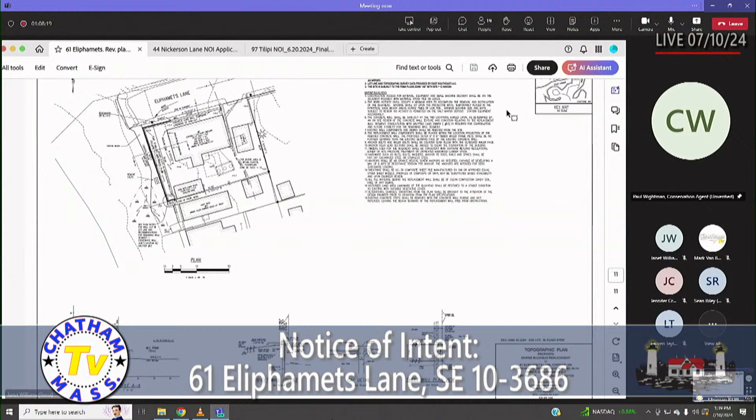So the applicant, Kyle Gould, contacted Sophia, and they worked on something that was a bit of a give and take. We understood from the last meeting there was concern about overwash and beach grass and how that would help water pass through the soil more quickly. So we talked to the owner about it, and what's now back before you is the request.

The land was a very scrappy but native grass lawn, a combination of native grasses and Spartina patens and different grasses that would take hold in that low area. There were a couple of Adirondack chairs, and everybody just liked the setting. It was very simple, very small area. But knowing that you might be seeking a strip of some kind of vegetation, we're proposing a 3-foot strip.

So if you can speak to along the top of the bulkhead. And with regard to water ponding back there, there is some freeboard where the ground is slightly below the wall cap, but it really won't be a big bad flood, and water will find its way out of there. So in the interest of the applicant having some kind of a setting that was there previously, but with an improvement to the vegetative character of the wall cap, that's what we proposed.

So without any further ado, Sophia could just describe for you what she proposed for the applicant. Thank you. Sophia Pilling. So I just put together some of these species really with the root structure in mind, something that would really hold everything together.

It'll kind of look the same with the Spartina and having some sedge in there also to mix in with what will be, after construction, a seeded native fescue lawn that'll stay low, so hopefully it'll blend together. And then I added a couple of flowering plants to provide some nectar for pollinators and add to the character, texture, and density of the planting. So this is all stuff that should take some salt water, take some drought, take a lot of sun and wind, and hopefully checks everybody's boxes.

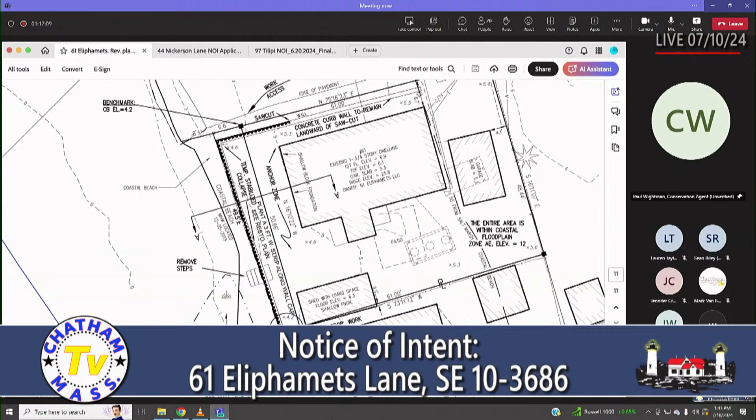We're going to replace that. It'll be a little bit less of a projection, but it'll be close. So it's a swap, except when we fill that chart out, are we going all the way back to the landward and perimeter boundaries of the lot, accounting for driveway, building area, landscape features, walkways? Well, no, we just need the coverage table for the wall, and if it's less area, it would show a negative change.

We just need it for the project, not for the entire property. Well, it's an equivalent, and I could get it down to the inches. So you'd say the current wall is this many square feet, the new wall is this many square feet, and it's a wash. But so we can know that the mitigation being offered is mitigation for the project. Usually it'll say maybe there's 0 square feet of change in what you're doing, but there's 500 square feet of mitigation being offered.

Right, got it. That's what I would need. I have to admit that in this project we saw it as an absolute straight replacement of an unsuitable wall, but we're happy to do what you need if you need us to go away and bring back those numbers. No, if you could provide the numbers, I'll go to the other commissioners if they have questions, but I'm not saying that stalls our moving on to an order. It's just for the order, we need to say if there's a change and what that might be.

I'd love to close this today. Well, thank you, and me too. We have a 49.5-foot concrete wall that fell down, and of course that was a much larger disturbance, but cleaning it all up and picking it up, it's likely, if you measure it, the cap of this wall will be approximately 1 foot wide. So it would reflect that it's an improvement—less jeopardy.

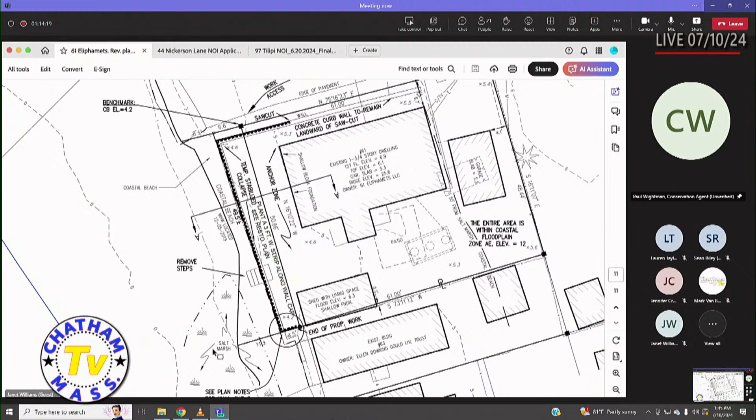Would you like something after the meeting we can put in the file, or just state it? You could provide it after. I don't think it's going to hold up anything. I'll let everybody else—nobody else has had an opportunity to jump in. I mean, we just need to know, is it an increase or decrease in square footage, and then how many square feet of mitigation is being done?

That's all. So your chart—I don't have it out, but it's in your notice of intent—it says 0 to 50, 50 to 100, existing and then proposed. Okay, because these oftentimes are in the resource. Okay, well that's good to know. I'll be doing those charts from now on. It's an area coverage calculation, and it's hardscape, but for the project, not for the entire property.

Okay, you can—I always took it to mean the project, what you have on a property and how you're changing it, or within the buffer, actually. But I'm good with this, and if I have questions I'll get back to you. That'd be great. Anybody else have anything?

And you'll need temporary irrigation or irrigation, right? Yeah. And that's always in our order.

Anybody else? Bob? I had a couple of questions—I think I asked the same two questions last time, so I hate to repeat myself. But you're taking out the staircase leading up to the wall. How are people going to access the beach? Are they going to walk through your planting? No, because you'd be jumping 3 feet or so to the beach.

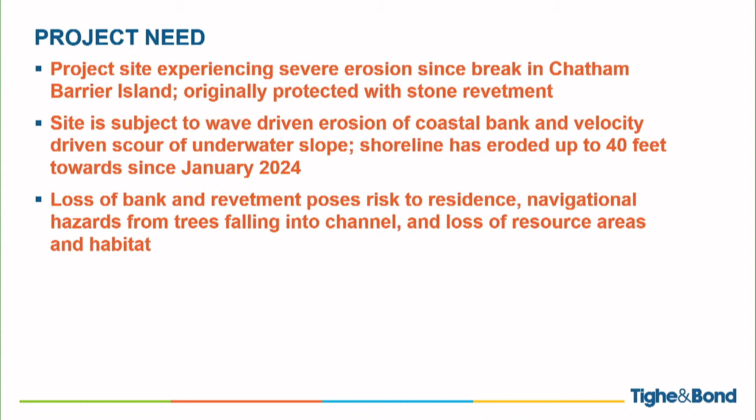Loss of the bank resulted in risk to the residence. We had numerous navigation hazards with trees falling off of the coastal bank, ending up in the water, washing up in the nearby aquaculture beds, and just kind of floating around in Pleasant Bay. And also loss of habitat because of the erosion of the coastal bank.

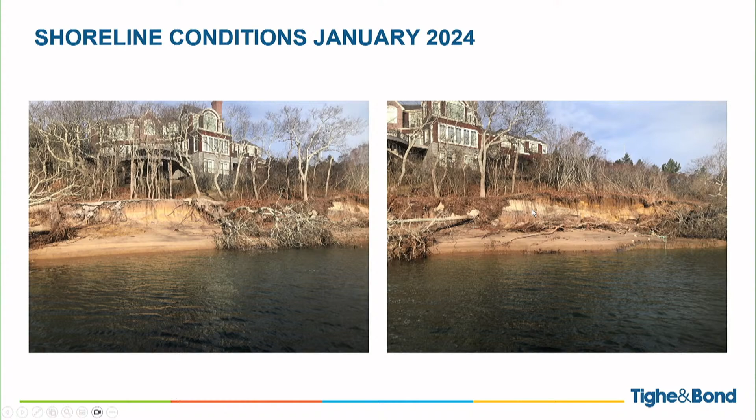Here's a few pictures from the water when we were out there, just to give you a better view. You can see the eroded coastal bank here, the little bit of beach that had developed, and there was more or less a little bit of a shelf here, with a very swift drop off underwater that obviously you can't see in this picture. Here's another angle, showing more of the same thing, wrapping around the corner on the south side of the house.

So for the proposed project, we looked at various alternatives out on the site. This started with just a replace-in-kind type project, given how everything had changed out there and how quickly everything was eroding. The first design iteration was a sheet pile wall with some underwater scour protection at the site. It was pretty high, like a 15-foot high bulkhead anchored back into the slope.

We went out and did some geotechnical investigations. The soils out on site are really not suitable for a solution like that. We also received a letter from CZM stating they were not really interested in a vertical sheet pile wall solution, due to it reflecting wave energy back into the system, which can exacerbate erosion issues. So with that information, we went back and reworked the solution.

We ended up with a reconstruction and expansion of the existing armor stone revetment. It has an 11-foot wide crest at the top, and the crest elevation was brought up to elevation 16, which I believe is the 100-year flood level for this area.

The revetment is overlapped with underwater dumped riprap. Underwater, there's geotextile that extends to the bottom of the large scour hole that's there, with a 3-foot thick layer of dumped stone over that. So that holds the underwater embankment so that soil stays there. Then you have the armor stone above that, which protects the bank from erosion.

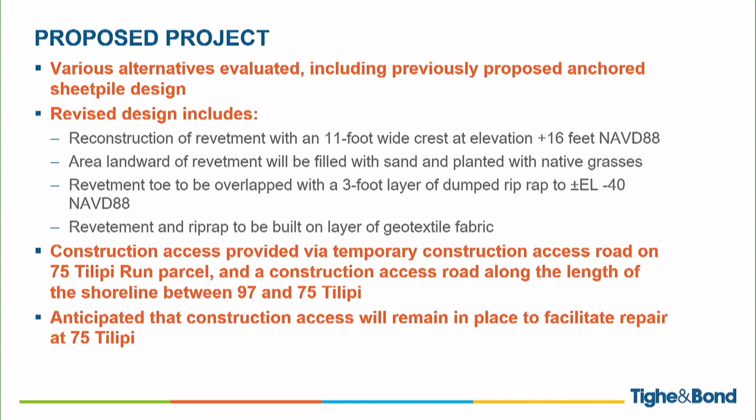Construction access to the site was provided by a construction access roadway that's actually on the neighboring property at 75 Tilipi, and then they worked their way down to the site to access the shoreline. It's anticipated that the access road will remain in place because it is the only access point for work on 75 Tilipi Run that is forthcoming in the near future.

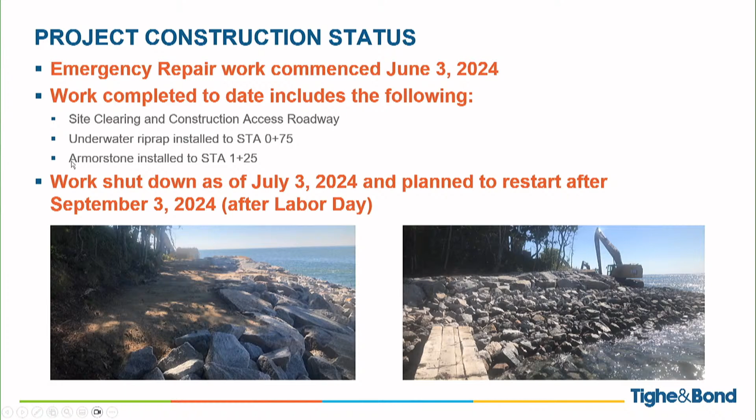And then the armor stone has been installed to about station 125, which brings us around the corner a ways to this area over here. With the way the site has been eroding, the southern facing portion in that corner has really been the most erodible portion, finding a new home very aggressively compared to other portions of the site. So that's where we concentrated efforts during our 30-day construction window.

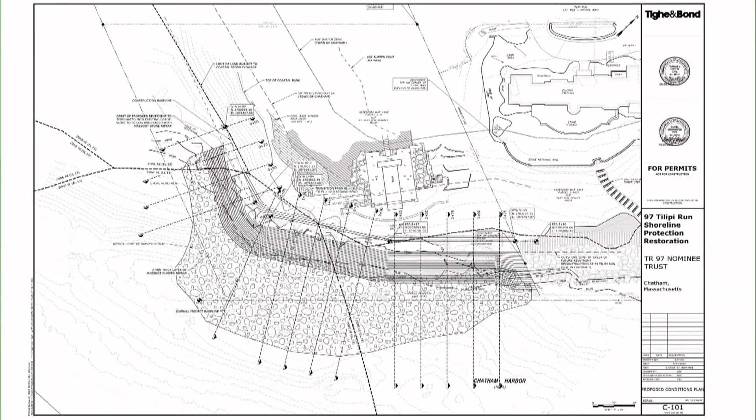For other approvals: the emergency NOI, the emergency ENF has been submitted to MEPA and is currently under review with them. Chapter 91 authorization, emergency authorization was issued on June 4th.

Say anything, I'll listen to it. Nothing to say? Oh, for the new project? Yeah, we're doing the notice of intent. So this is Dan, I don't know who she is. I'm sorry, go ahead Paul. All right, okay, oh sorry. Could you please turn off your camera? Whoops, Sonia, could you please turn off your camera?

Go ahead. All right, Army Corps of Engineers approval was issued on June 21st. There's a significant compensatory mitigation portion of that which has been taken care of. The modification to the Cape Cod Commission DRI was issued on February 20th for the original design, and then it was revised again for the design in front of you today on April 30th.

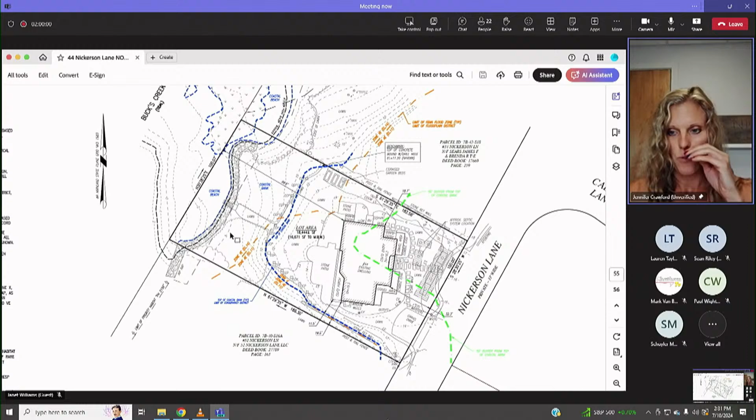We provided a plan that shows a fiber roll installation adjoining to the end of that revetment and continuing on to the property to the north. It is a small bank, so to speak. The top of the revetment, just for reference, is at around elevation 5. And so it's very, very short, so to speak.

Where we took our profile B on our plan that we were showing you, that is the highest part of that bank, so to speak, and that is at around elevation 9. So there's about 4 feet in grade change at that elevation 9 down to where the top of the revetment is. And the bottom of the revetment is at roughly around elevation 1, mean high water's at like 1.5. So there's about 8 feet of kind of open eroding area at the highest point, at least. Most of it is much lower and more gentle.

So we came up with a fiber roll installation that we want to basically build off of the end of the revetment. There are some of those very, very end stones in the revetment that have started to have some scour behind them. It's hard to see in these conditions because the vegetation kind of overlaps it, so to speak. You've got to kind of poke your head in there, so to speak. But those stones are starting to become, I believe, a little bit loose just because there's nothing behind them anymore.

Our intent would be to snug those fiber rolls as tightly as we can. We may need to adjust a stone or two to help make that fit and to make sure that we can anchor properly in that area.

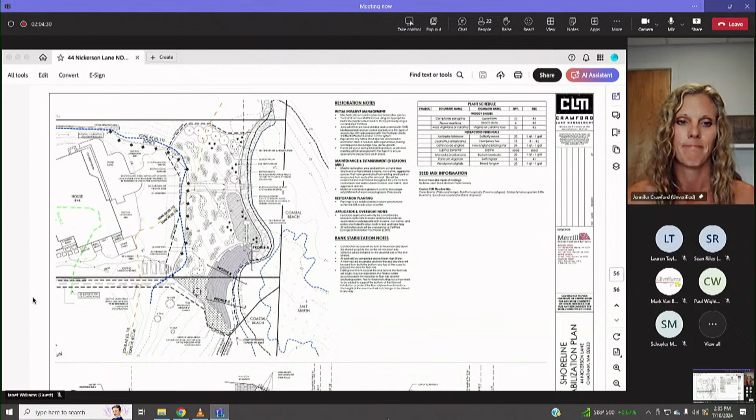Anybody want to start? Thank you. Anybody want to start? No? Okay, well I had a question.

You say in the introduction and goals that you will be removing and managing existing invasive and non-native species and revegetating with native. Do you know how much non-native invasive there is?

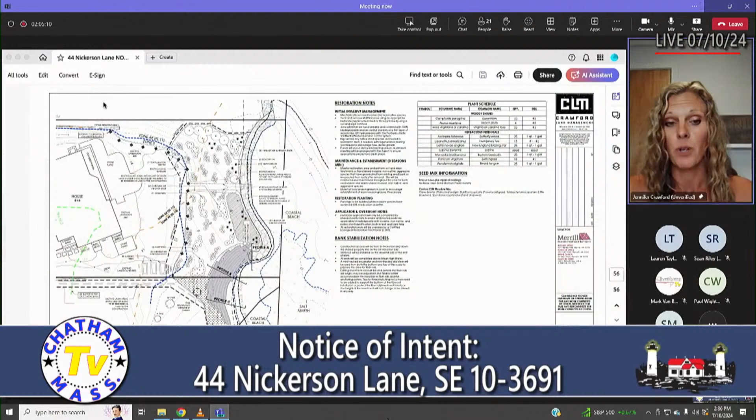It's almost all of it. Really, the only area that was notable in terms of having any sort of colonization of natives is that area right on top of the revetment that we have shown and hatched in our plan.

There may be some sporadic things popping up in there, a lot of bittersweet that's overgrowing, but per our standard protocols, if we encounter natives within, we will leave them.

So also you've mentioned the neighbor 34. Yep, they are a part of this application... and they are a part of this application.

Okay, I only saw that it listed 44 as the applicant. So that's why I was asking.

I believe that they are listed as an additional on it. There's additional pages in the notice of intent with their signatures, and abutter notifications did go out for that property as well. Right, okay, yep.

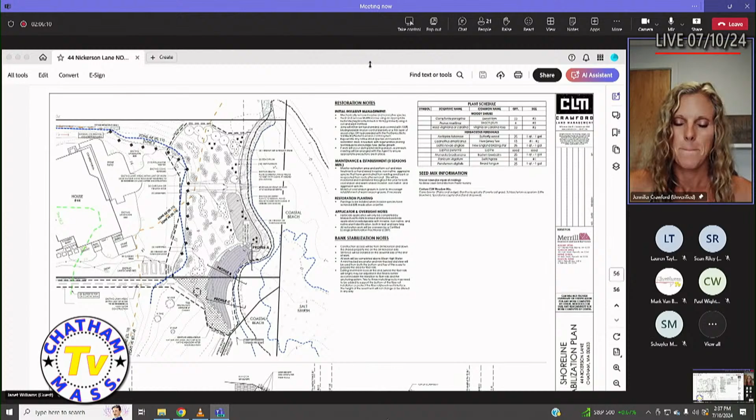Another question I had is, in your restoration notes, the initial invasive management, you say you're going to use 100% biodegradable erosion control blankets, or a thin layer of wood chips, or hydroseeding. What is going to determine what you're going to do?

Partially it gets determined by the time of year, sometimes by the slope. In this particular case, as long as we receive all of our approvals in a timely manner, we do anticipate being able to construct this fall.

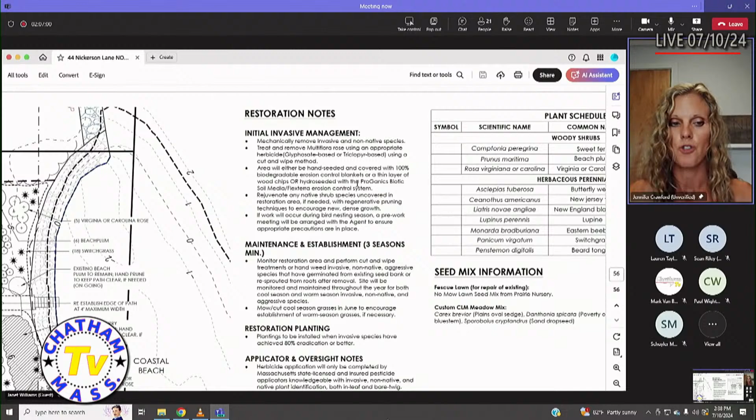So we would do the invasive species management then, and that would honestly really be appropriate for any of those methods. But I believe that hydroseeding would probably be the most efficient method, and we've gotten very good results doing that, especially in the fall and winter months.

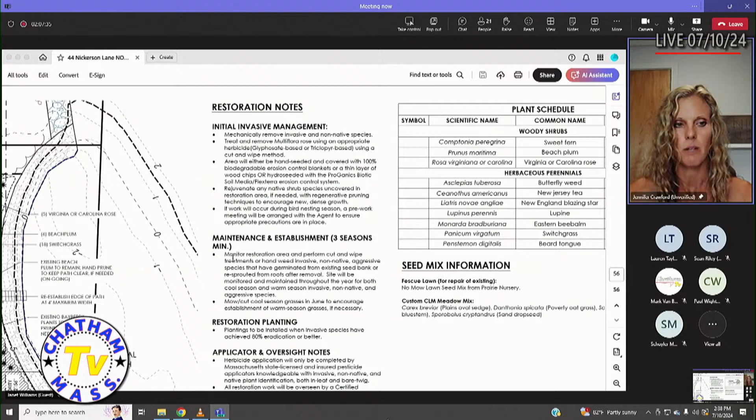And you're still waiting for the NHESP letter, correct? Yes, that is correct. We have not received comment from them. I don't anticipate that there will be any issues there, considering the majority of their jurisdiction is seaward, and there's only a very small snippet of the project that is actually in their jurisdiction.

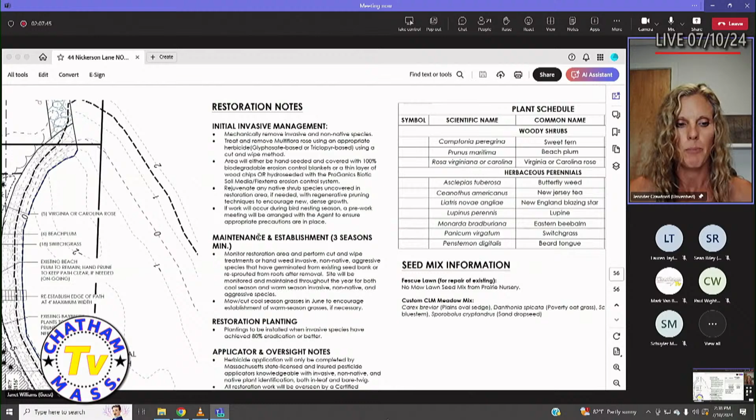Okay, anybody else? I'm just happy to see him try the fiber rolls off the bat.

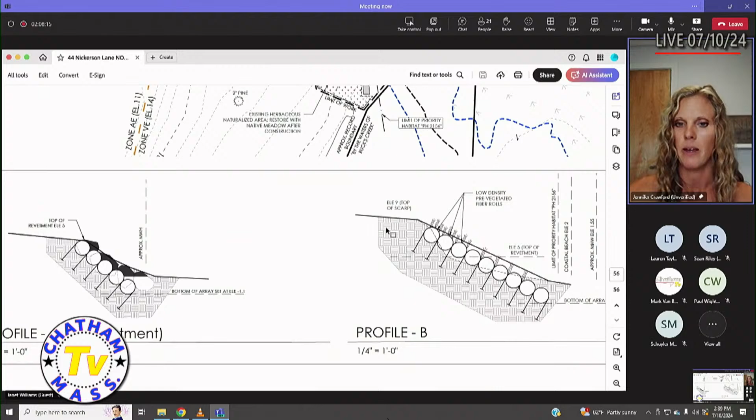Hi Jen, so have you done this before, where you fitted fiber rolls up against an existing revetment to join them? I don't believe we've done it against a revetment. We have done it against a bulkhead. We had a project on Bass River where there was a section of the property that had a bulkhead installed, and we had to fit behind and adhere to the edges of the bulkhead. So I'm hoping this is actually a little bit easier than dealing with a bulkhead structure, but different, we're gonna just see.

So I was just looking at, right where the profile A line runs, the revetment moves and the fiber rolls cross each other, but what looks like part of the revetment is shaded, so I was trying to figure out how that matches up, how that integration of the bulkhead and the fiber rolls and the revetment will work together. So I think what is going to be most likely, and I wish Nick could be on this afternoon...

He's out in Dover at the moment, because I think he has a game plan in his head. But I think what we are going to try first is, there is an end stone or two that are a little bit loose, so we may need to move that out of the way to be able to get the fiber rolls back to an area where the revetment is still solid and where there's still contact.

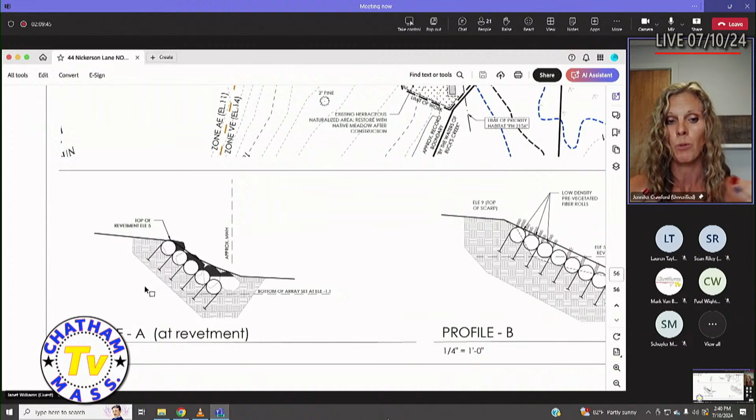And I believe that if we're able to anchor in that place, the fiber rolls really kind of dip back in almost behind the stones in that area because there is some scour. So the hope is that we will be able to tuck them back in, and then the stones, if we have to move any, like a couple off the end, we'll be able to put them basically back over that interface to protect the very ends of the fiber rolls a little bit.

So there's no intention to change the revetment in terms of its form, location, or height or anything like that. It's just really needing to have a little bit of flexibility to work with those very end stones that were racking at one time back into the soil, I would assume.

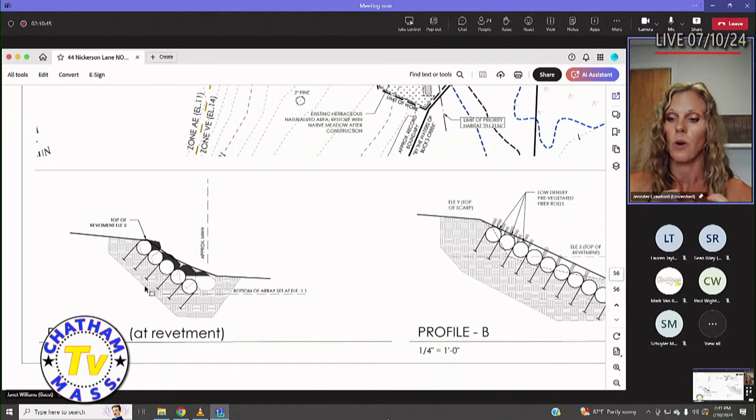Right, and is there any particular protocol that would be called for to make sure that the stability of that end of the revetment is not compromised in any way by the fiber rolls pushing behind or pushing them in some way? The intent would be that we would not be excavating behind any solid stones that are there to tuck them in. It would simply be finding the place where those are still solidly fitted and joining the fiber rolls at that juncture.

And we may experience that as a part of the project that is problematic down the road. I don't know, and if we do, I guess that's where our monitoring of it and being back in touch with you comes into play, because we very well, 2-3 years down the road, may need to propose a different type of transition to aid in that.

I'm not sure. Yeah, there's a lot of unknowns when you're doing projects like this, and that's why we have a lot of flexibility built into the ways that we can respond and approve different changes as the need comes up. So there's nourishment proposed across the entire array of fiber rolls, and that's going to be ongoing, perpetual. So we'll have a continuing condition that authorizes ongoing nourishment?

Yes, so that we can just keep them covered. We don't, in this particular case, want to keep them covered with a large volume of sediment, simply because we are trying to actively get them vegetated. And if we put too much sediment on top of them, we won't be able to get the growth of the plants and the root growth that we need to adhere into those fiber rolls.

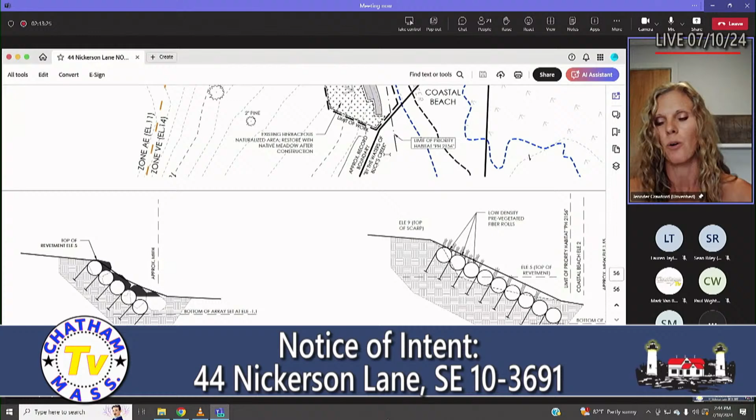There's no problem with that, so to speak. It's more about if we're not at the end or reasonable end of winter storm season, and we've seen repeated events come through and really sweep all that nourishment away. It just kind of seems pointless, so to speak, until we get through storm season.

But other sites are different, and other sites have a tendency to, unless a storm comes from just the right direction at just the right tide, persist with that nourishment for longer. Sometimes one to two seasons you still have a decent amount of nourishment there. So it just kind of depends on the season and the area. This area had end scour for, it's been there forever, but it was really this last storm season that they saw that move.

So to speak, and it hadn't moved in quite a few years, at least not in any significant way. So my hope is that once we get this installed and going, that we will not have a constant need to renourish here, but certainly I'm sure it will be necessary at some point.

Currently, it's a very nice, gentle slope because of the erosion that did happen over the winter. So I think that hopefully will bode well in buffering anything that we may have coming up, especially as I heard the most active hurricane season predicted in a while. It's a prediction, it's not an assurance.

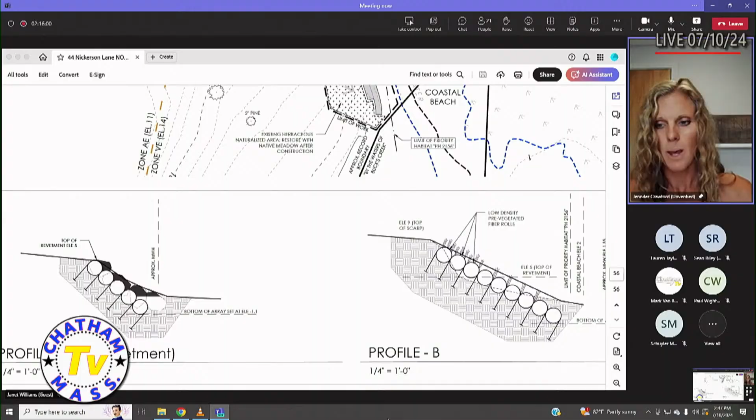Jen, does it make sense to have like a temporary snow fence in front of that, just to protect that whole area while it establishes itself? You mean at the bottom of the fiber roll array? Possibly, yeah.

Possibly. I actually hadn't given that much consideration. I may be concerned going into storm season about a snow fence, just because I believe it could potentially get beaten up pretty bad. But I don't know the answer to that. Let me consider that, and since I have to come back to you once we get NHESP comment anyway, I will give you an answer to that.

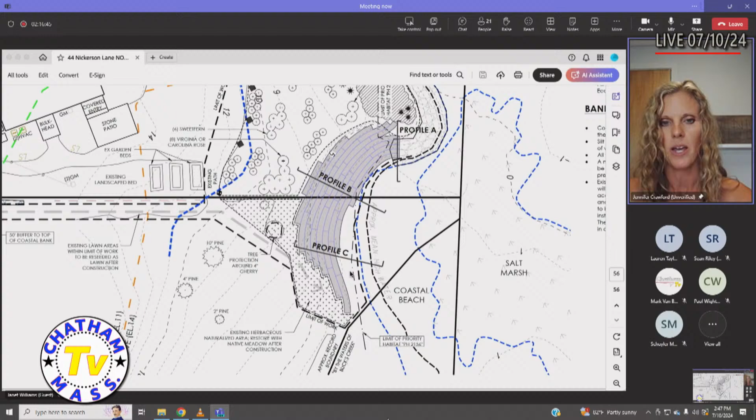Okay, thank you. Perfect. Anything else? Anybody? No? Okay, so we're going to continue. There's not a lot that we need from you. We have the NHESP letter, and then you're going to consider the snow fence. I don't think anything else came up. So when would you like to continue to?

Dare I say the 24th. We should be receiving NHESP comment very soon. And I would love to get, we're not up against a super crazy hard deadline, but I would love to get the permit and everything in order as soon as we can. So if you have room for us at your next hearing, that would be really great if we could get. Sure.

Back in front of you, since there is so little work left. Yep, we can do the 24th. I just want to say, my only concern about the snow fence is if you have a bad storm, you'll be picking up pieces of snow fence down the coastline.

It's a nice idea, I just don't know about after a storm. That's exactly why I wanted a moment to consider it, because I can see how it could be beneficial, but also how, if it's not monitored or taken out before a storm, it could cause the same issue. So I'll give that some consideration and get back to you with my thoughts when we're back on the 24th.

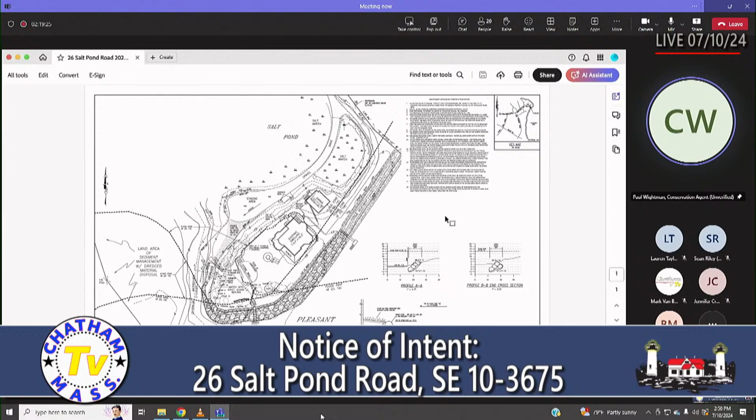Hello, Bob Perry, Cape Cod Engineering, working with the Holmes family here at 26 Salt Pond Road. This has been with you for a while, and it started out as about a 110 to 115-foot extension of the revetment. Through an on-site meeting and discussions with you, Ted, and the applicant, we have a final revision that is a 35-foot extension.

After going through this with the Holmes, their main interest was to address the main problem, and it was a logical stopping point to keep it to the south of the existing stone steps. That main run of steps can stay there, but there's one or two steps at the bottom that might get reset in the process. The sand fill and beach grass would still remain part of this project.

So we have this 35-foot extension of the existing revetment that basically takes care of that eroded scarp that you saw there. Our hope is that the remainder of the shoreline is sheltered enough, and with the nourishment, it'll do its best to be stable. So that's where this is.

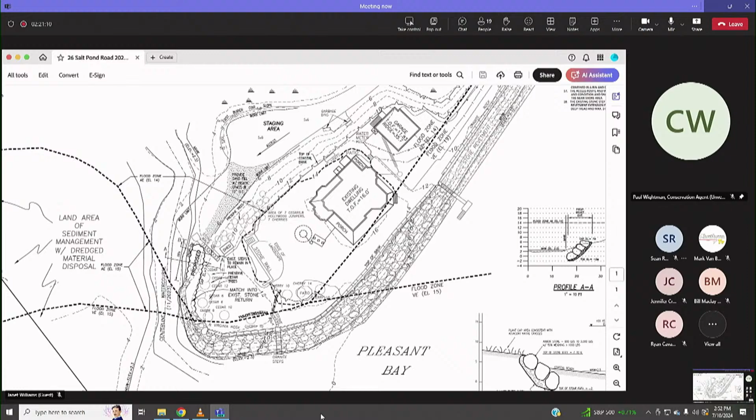Thanks, oh, one thing before I forget - in reference to the last conversation I had with you, it's 480 square feet of hard revetment that would be added to a very large area of revetment that's already there. The notice of intent did have some different areas listed in the main part of the state form, but it's quite different now. Thank you, and thank you for shortening it, I appreciate that.

Questions, comments? I have a quick question - thank you for pulling it back behind the stairs. So the area on the site plan where the extension now just says 'proposed,' is that... That is the proposed extension, I think the word 'extension' may have slipped away, that's what's missing. Okay, so we can just fix that, because it's not designed to look like stone revetment to match the other, to differentiate it, which makes a lot of sense.

Yeah, the survey line type is different than the drafting line type. It's kind of odd, but it's really just a projection to show you the location, and then the profile views show you the verticals. Yep, they're down here, they look fine. Thank you, anything else?

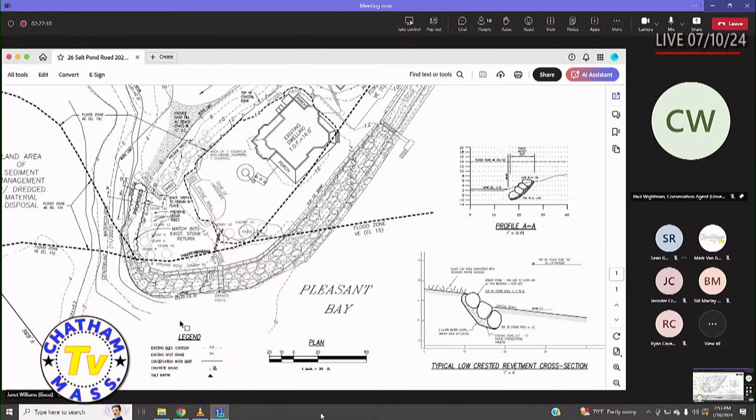Okay, I think we can go to an order. How soon do you want this? If you want to fit us in on the same August hearing, you're welcome to do it. Great, okay, August 7th it is.

I move that we approve the notice of intent and prepare the order of conditions for 26 Salt Pond Road at the hearing on August 7th, 2024. Second. Janet, aye. Elise, aye. Eric, aye. Cheryl, aye. Bob, aye. And I say aye. We'll see you the 7th. See you in a few minutes. Thank you, yeah.

What else does he have? Oh, Salt Pond, yeah, he's - Mary Molden, okay.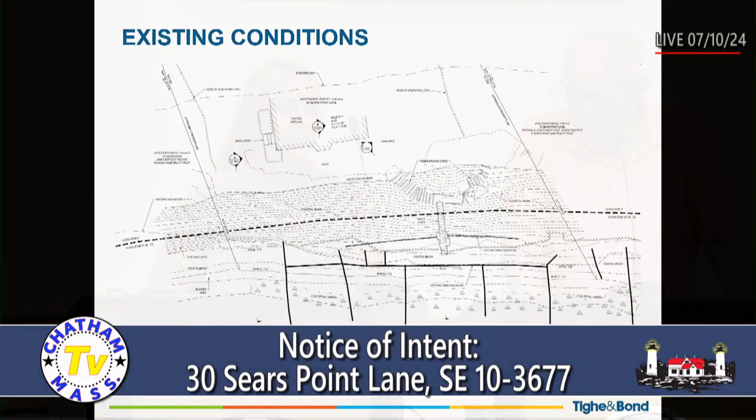Catherine: So we've been here in front of you before, and we have the existing conditions plan, which you're aware there's a lot of timber structures out there that are kind of deteriorating, and some bank that's got invasive species. So our revised plan includes removal of the timber bulkheads that are out there and replacement with one single timber bulkhead close to the bottom of the bank, the toe of the bank, landward of that previous seaward bulkhead.

The timber bulkhead will be offset from the property lines at each end and have returns. On the northwest end, it will be offset from the property line with fiber rolls from the return to the abutting property, with permission of the abutting property owner who has fiber rolls on her property as well. We propose nourishment on the landward side of the bulkhead to fill in. The bulkhead is proposed to a +9 elevation. The base flood elevation here is 13, so we're staying a little lower than that.

We propose in-kind replacement of the stairs, just because some of the stairs are starting to rot, so just in-kind replacement, no change to the design. And then the timber groins in the salt marsh, we propose to leave in place to not touch the salt marsh, but if the commission would like us to remove some of the boards above the salt marsh, or the full boards, that can be conditioned as well.

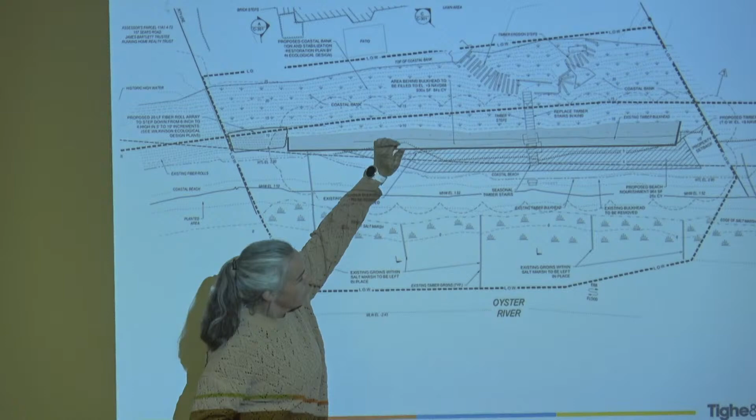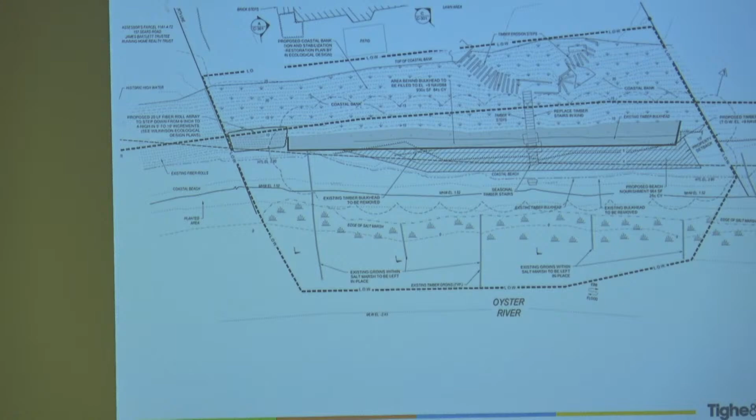That's the one that's seaward and that's the one that's landward, kind of right in between those two. So it's more at the toe of the bank, so that when we fill it, that bank will have a more stable slope. That's where I was going with this question—why would you not put it right at the toe of the bank? So we can make a more gentle slope to that bank.

When they redo the mitigation on that bank, it'll be more of a stable slope. Right now it's a steeper slope, dropping off as it comes down. So if you move it out here and fill the area in between, it's gonna be more of a stable slope there. It creates a more gradual slope, I see.

All right, somebody else wanted to speak? I can't tell who it is. Yeah, my name's Ryan Kavanaugh with Tighe and Bond. I'm helping Catherine present today.

I just wanted to note that the location of the bulkhead is a medium distance offshore of the existing upper bulkhead. It doesn't run truly parallel to the beach and the water line, so we picked a line of best fit. Okay, thank you.

I hate to be a stick in the mud here, but when I look at these things, for revetments and bulkheads, I really don't see any erosion where the bulkhead is. It's not terrible. I see the area on the west side, and that's great, you're fixing that, but to me I just don't even see the necessary reason to have one.

Well Eric, right now there are two bulkheads there. So the option is we either leave them there, or we improve the situation by taking the lower one out and putting one in that's effective in reducing the steepness of the bank. So we think the proposal is a vast improvement over what's existing.

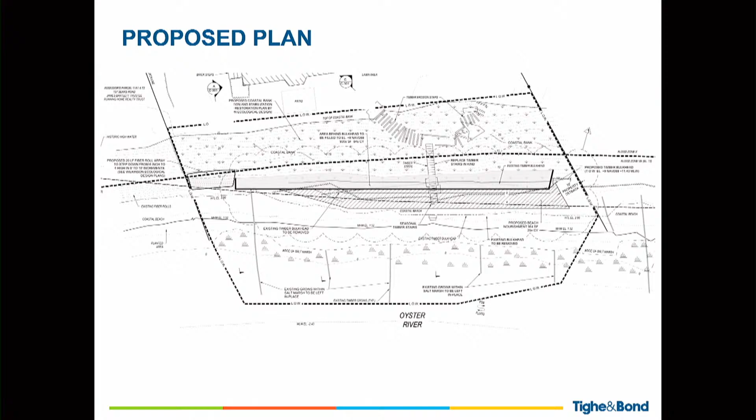Well Eric, do a little history. The property to the north, I think, is Bartlett, and then the property north of that is McDonald. McDonald was having substantial erosion, so we ended up putting in a rock revetment and then fiber rolls. The Bartletts resisted doing anything because they thought they didn't have to, and then all of a sudden their stuff started eroding, so they put in fiber rolls for almost the entire length of their property. So what we're doing is anticipating the need to protect, and we're joining with the Bartletts by putting our fiber rolls right to the property line. This is a situation that has been developing for years, and all we want to do is protect our piece now in a manner that makes the most sense.

So I know, Catherine, you said that you have permission to tie in fiber rolls to the neighbor. I'm not seeing that on the plan. I'm assuming this is something that has happened recently, because I see there's the proposed bulkhead with a 10-foot property setback, but I'm not seeing that any fiber rolls are reflected on the plan.

We have that - right at the edge is kind of a grouping for the fiber rolls. We have it proposed, but only if agreed upon by the abutting neighbor. That hasn't happened yet? Well, we've been having discussions with the Bartletts, particularly Sonia Bartlett.

Sorry, I was looking the wrong side. Yeah, no, I saw it. But okay, so you don't yet have that agreement? No. We don't have the design approved yet either, so... Okay, but it's a chicken and egg problem. So what if we approve this and then you don't get that agreement, or?

Well, we anticipate that, because of the conversations we've had to date, we believe if you approve this, we'll have the permission to do it. Okay, or it can be conditioned that they can't be installed until agreement with the abutting property owner.

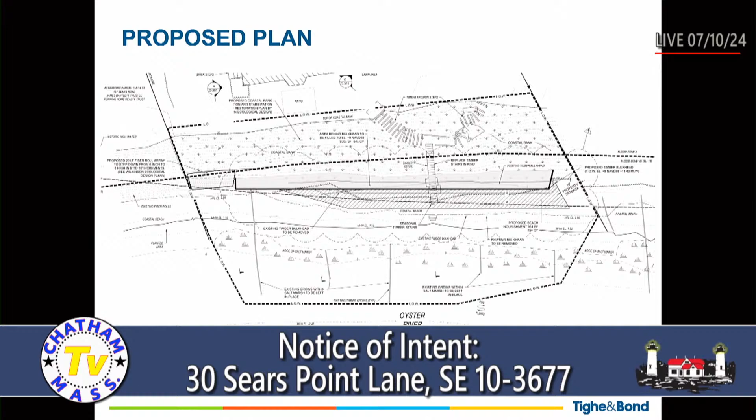So we wouldn't be filling a large amount that would then wash right off into the salt marsh. It would be a small amount to keep that nourishment there. Yeah, we want to protect the salt marsh too. Great, thank you.

Anybody else? Can I join remotely? Could you identify yourself, please? Yeah, my name is Bill McClay. I am the manager of the property for my family.

I just wanted to speak to two things. The first was we would be willing to install the fiber roll on our property. So if that's a question... I know that...

It's not a popular opinion, but the bulkhead that is now along about the high tide mark has been maintained. That and the groins have been there for many, many decades, from before I was born. And the bulkhead closest to the Bartletts, we have not maintained. And that actually is where recently the most eroded part of the bank has occurred.

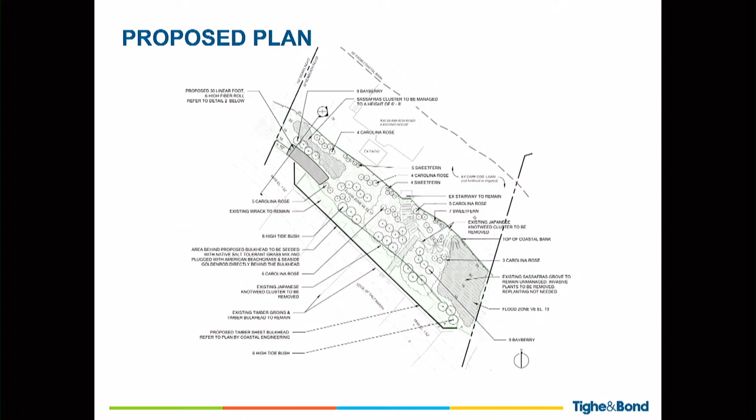Yeah, what would you have in mind for that? I don't know, maybe some larger stone, or it wouldn't have to be a continuous run of metal edging or anything like that. Maybe something more natural, informal. I think we'd like to work with the homeowner to figure out exactly what they would be okay with too, so if you were alright conditioning some sort of delineation there, but giving us a little flexibility on material. Maybe some stones placed every 20 feet or so. We're flexible, just something to protect that area and delineate it a bit, that would be good.

Yeah, I just want to follow up on that, thanks for the reminder, Bob. As I look at it, the planting plan stops at the top of the coastal bank, so there's no plan for a vegetated buffer strip at the top to prevent erosion. Well, we'd be happy to do like a 2-foot buffer strip at the top. Okay, 3 feet.

I do worry about that brick patio there because it is so close. It's only a handful of feet off the top of the bank. If that patio stays, and I'm pretty sure there's no permit for it, it would minimally need a vegetated buffer strip between the patio and the top of the bank, and that would be best to run along the whole bank.

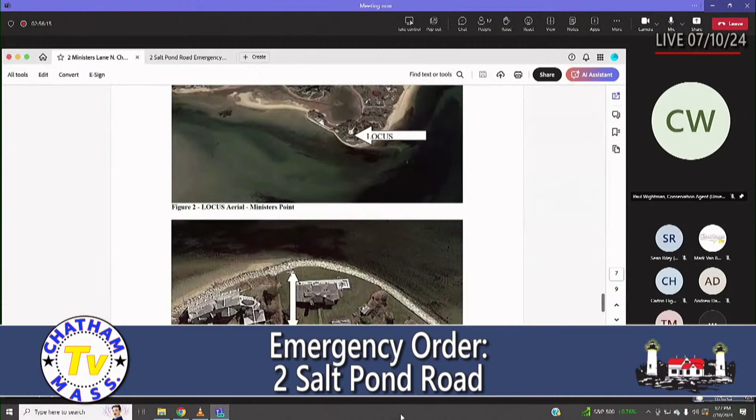So I can't predict what we're coming back with as a future design, or if I'll even be in my wheelhouse. This is a limited amount of work while we explore contingencies for taking future action in a more predictable manner. I'm not looking to play chance with the coast, but the coast does play chance with us. This is a limited amount of work, and there's your access on the left side of the house. The collapse we're looking for is seaward of the square deck. On the right side of the home, we have a terrific current through there, and I'm hoping it would abate, but we don't know. So that's my speech.

Thank you. Are there any questions, comments? Bob, go ahead. Hi, Bob again. How are you? Very well, thanks, Bob.

The access route over the lawn with the machinery, wouldn't it be easier to deal with this from a barge? Well, a barge is very expensive, and it does need to get close. If you think about where this is, an excavator sitting on a barge would be leaning out, pitching stones with loads outward from the barge, and I don't think it's necessary. A mid-sized excavator can come in here. We don't want to put massive rocks on this patch. The patch is higher up. We don't want to overload the stones below. So I think it's a very concise and manageable job from the upland.